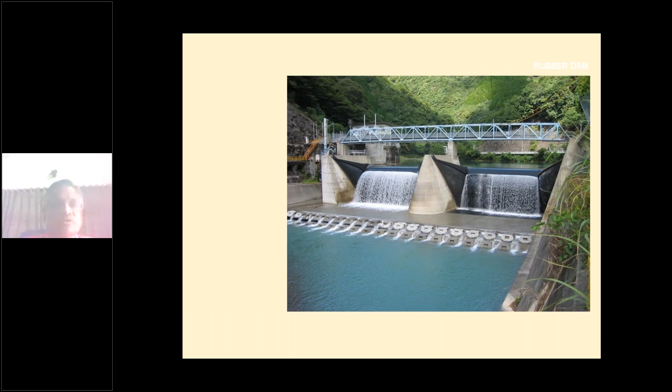The initial idea was to have a bridge very close to this place, close to the existing barrage, but it had huge technical challenges to overcome in putting another bridge there. So a decision was taken, after a lot of investigation, to move this bridge to about 600 meters downstream of the river Yamuna, and construct a bridge there.

This investigation was done and a decision was taken by the Government of Delhi, and we were asked to execute this project. The Delhi government requested Delhi Tourism to undertake it. As we started working closely on it, we were told by the Chief Minister herself that the Commonwealth Games were coming, and we should create a very significant structure to commemorate this event, one that should become a landmark for the games as well as for the city.

So this was a huge mandate given to us at that time. She was very passionate about this idea, and it made us think much further than creating just a bridge. We thought of taking it further, so we took the services of some of the eminent brains in this particular field.

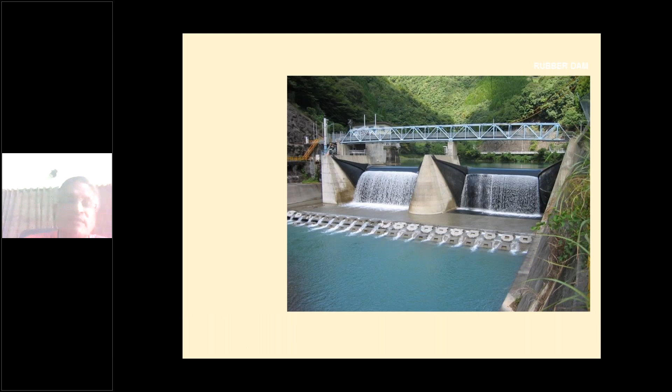To create this water body, we have located the technology of the rubber bridge, the rubber barrage. It's already constructed elsewhere, so thousands of such things exist in other places. It's simply a rubber tube which can be pneumatically expanded and reduced. Air can be pumped into it, it will come up, and it can hold water.

The idea was during the flood, the rubber barrage will be collapsed. But after the rain, once the flood is over, air can be pumped into it, and it can hold water a meter, 2 meters, whatever is required, and the barrage can be created. So during flood, you will close it and that part cannot be utilized at all. This technology was available, and we worked out the technology and cost aspects, and found it is very interesting and possible.

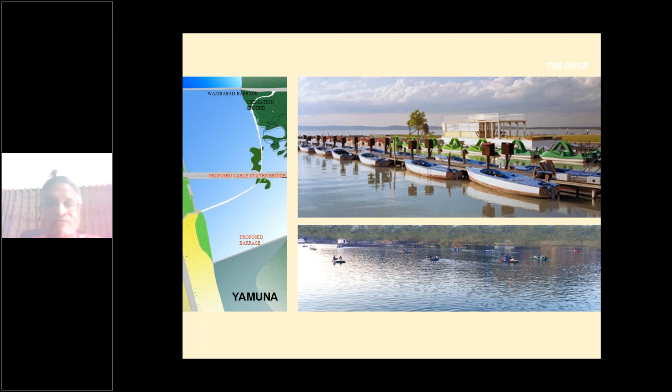This water body can be utilized for boating. There are several other things that water can be used for. The water body will become one of the central attractions for the people of Delhi. In the evenings, it's a sacred area also, and so many things can happen there. People can come in the late evenings and enjoy. You can have restaurants, floating restaurants - there are many things that can happen here.

This is also a very interesting, very religious place. During Chhath Puja, a whole lot of people come here. So we create specialized facilities for them, so that it becomes a regular evening destination for people to come and pray and pay respects to their gods.

These are some of the things happening now. People come and feed the birds, and it's a very interesting evening, but you can't approach because of the dirt. But there are people who come and really enjoy their life here. People do come and play. It's very interesting that on occasions you can see a whole lot of people, without any publicity, come and enjoy themselves in this particular area.

This happens very often. And we also have a dhobi ghat there, which needs water supplied to them every day. Practically the entire northern part of Delhi gets their clothes cleaned at this particular place. So we'll create facilities for these people also.

Then there is a Smashan Ghat, and there are so many cultural and heritage activities going on in that particular place. And on the western side, there is also a very interesting Buddhist colony, a Tibetan colony, which brings in the heritage of Buddhism here.

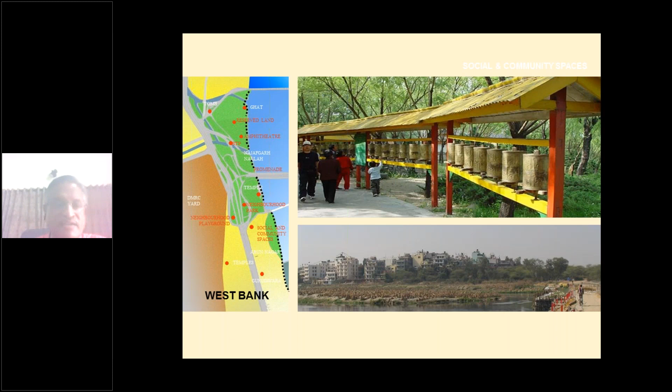We thought that we can create particular places for reviving and showcasing their culture in this area. The eateries in this place are very famous - in the evening, it's full of university people. We thought we can bring more Delhiites to this place, and this Tibetan culture will be a major attraction for them. They bring a lot of clothes and a lot of interesting food, all very economically priced, so a whole lot of people visit them. We can create amphitheaters so that cultural events can be held.

On the eastern side, we thought that we'll create places where evening people can come from East Delhi or from both sides, and we'll create places for which we have divided. After doing the hydraulic study, we have divided this particular area into 2-3 classes.

That is inundation floods, 25-year-old flood. Some areas will be inundated every 25 years. Some will be 50 years, some 75 years, some a 100-year flood.

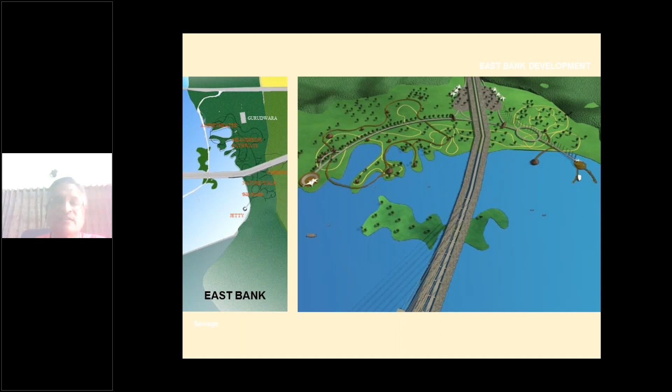So where the 100-year flood is there, we can create more permanent facilities like hockey grounds, football grounds, cricket grounds, golf or anything like that. The rest of the places can have basketball courts, volleyball courts, running tracks and everything. On the frequently flooded areas, we can have temporary structures like walkways, gazebos, eateries and other places where you can come and enjoy.

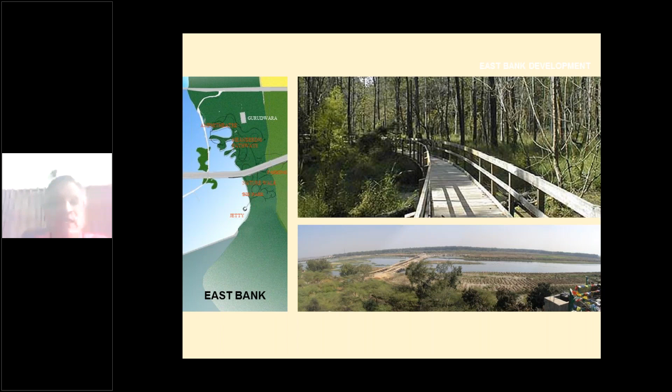So this was the basic idea of creating a tourism-centric attraction for a particular place, water sports, any number of them. So we presented the project to the government.

Because everybody was busy with preparation for the games, in one of the cabinet meetings they decided that cleaning water and getting something done in the river Yamuna is a very sensitive issue, because a whole lot of environment people are also involved. So that will take time.

So for the time being, even though they said it should be done, let TDC take up the bridge first and let them come back to us with the bridge, and we will think about the tourism destination area as a second phase. So this was a definitive decision. We said we'll keep it for the later future and focus on the bridge.

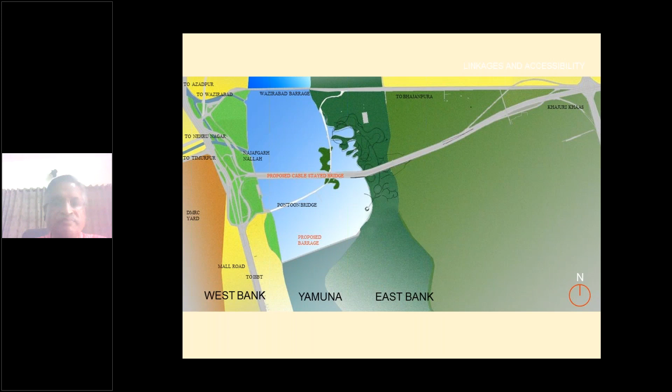From there onwards, our idea was to present a proper bridge structure to the government and the people to take a call on this. So if you look at the whole thing, we have divided the project of the bridge itself into several sub-projects.

If you look at the scheme, on the western side, where this particular road from Khajuri Khas comes to the western side and meets the ring road, we need a signal-free approach with several flyovers, or grade separators, to make the traffic smooth with no conflict.

In addition, there was a whole lot of cyclists coming from this place, so we were asked to introduce a smooth and clutter-free ride for the cyclists also. So we created a separate sub-project of the western approach.

Similarly, on the eastern side, we were to create a signal-free approach for the main traffic coming here, and at the same time for the ring road, which is going to develop as a ring road for the east, a clutter-free, signal-free traffic area. So this is the eastern approach, another sub-project.

And then the signature bridge. So there are three sub-projects in the main project: the signature bridge, the western approach, and the eastern approach. This was the scheme that we thought would make life easier for us.

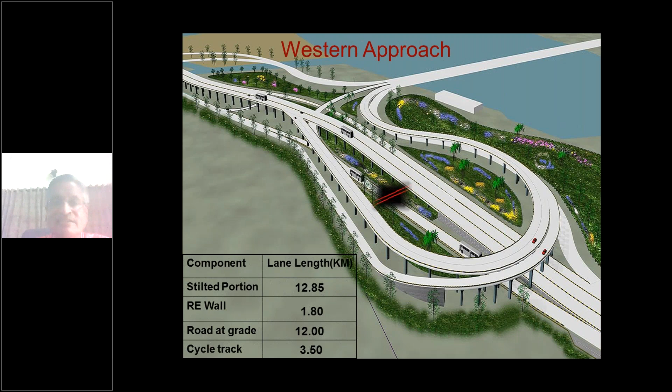But today my focus will be on the bridge only. Maybe some other time - this is a very interesting project, completed smoothly using excellent technology. If you go to the eastern approach, the stilted portion is less, about 4.76 lane kilometers, but there is a 12 lane kilometer long embankment, done in concrete.

The entire pavement on the surface is done in pavement quality concrete, using completely mechanized pavement quality concrete, and this has been done for the entire embankment here.

Almost 1.8 kilometers of RE wall and 20 lane kilometers of roads were created for the eastern approach. Very specially, for the eastern approach the entire foundations were wells. Very interesting project - on the western approach, it is all piles. So all kinds of technologies were used in this particular project.

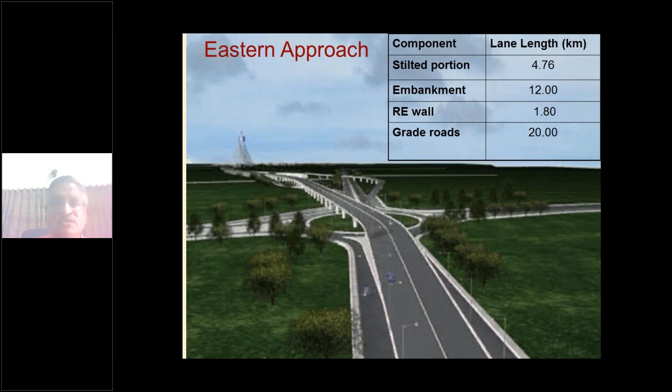And for the signature bridge, we started thinking about it. So we get into the topic of the day, the planning part of this bridge. We started thinking about it for almost 10-15 days of clear thinking about what can be presented as a unique thing to Delhi - by doing heavy engineering, at the same time very aesthetically pleasing, and it should become a memorable structure.

So this is the idea - the idea of the government, and the idea of our group also - that we can present the government something. Now this is the most interesting part of it. When such a significant word is used, what is significant? This was the idea which went up and down before we came to a solution. So this was a very interesting journey.

I thought it will be interesting for people to see how very careful and fine minds work together to create something which is quite unique for this country. So this story is a very interesting part, and I didn't want to skip it.

That is why I told the organizers that let us do this presentation in 2 parts so that it's quite interesting. It's not heavily mathematical, it's not highly technical. It is a process of how to bring in aesthetics, and as you will come to know, it is in your mind and in your determination to do good things. So that is how this project was created.

While creating the technology, we looked at the existing tall structures around Delhi, and one of the most attractive and signature structures of Delhi is Qutub Minar. I hope most of you would have visited this beautiful structure. It is also very unique that this is the tallest masonry structure in the world - many people may not be aware, but as engineers we should know. This is to the credit of our ancestors. It has not been surpassed by anybody so far - tallest masonry structure in the world, about 75 meters.

So we thought let us create something double the height - that would be one way to make it unique. So we created a cable pylon which is 160 meters high, with symmetrical cabling, meaning cables on both sides - 250 meters on one side, 250 meters on the other, with a central pylon and just cables. This will make it interesting, because the height will make it quite visible and unique.

To add a little more interest, we created a restaurant on top - a viewing platform and a restaurant on top, which can be approached through lifts running on the sides.

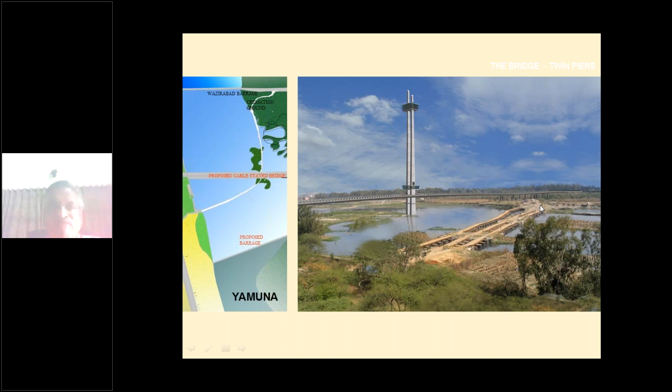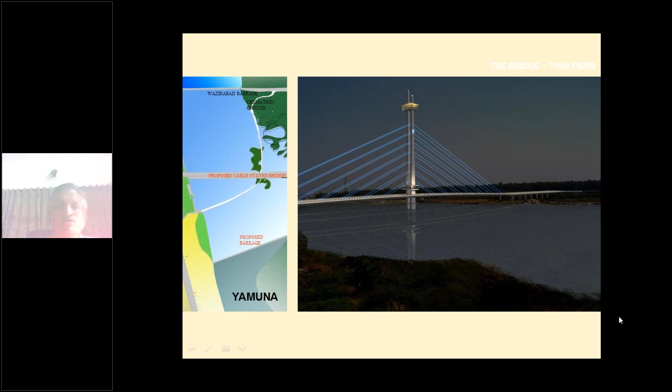This is the way it looks in the daytime. It's quite interesting and challenging. We thought it's quite challenging, and at night we can use a very good lighting system. At night this will look like this. You can see the top of the viewing platform. With all those things, we thought this is a very good design, and we will present it to the government.

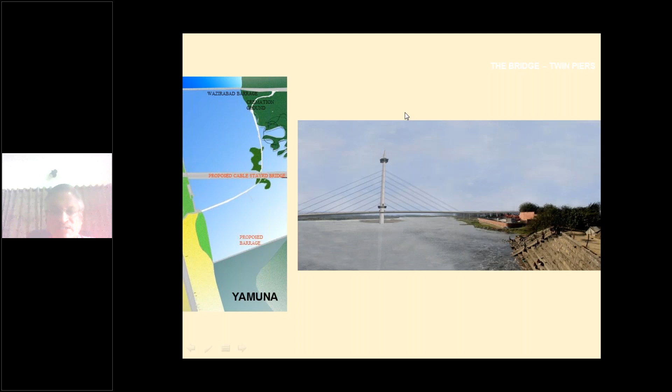So after a lot of preparations, we went to government to present this one. This is the arrival platform, and we presented it to the government. There was a meeting, the Chief Minister took the meeting, most of the stakeholders were there, and they went through the presentation very well. At the end of the presentation, everybody said it's quite interesting and worth pursuing.

Then the Chief Minister, Mrs. Sheila Dikshit, raised one very small question. She asked the main designer, Mr. Jörg Schlaich, has any similar bridge been done anywhere in the world? He can be talked about as one of the best 4 bridge firms in the world, Schlaich stands up as one of them.

So he said, yes ma'am, there are many structures like this one coming, but this has got its own features which will make it unique. So she asked, can you make something which has never been done anywhere in the world? The gentleman who was standing just sat down, it took him completely off his balance, and he sat for a moment and looked at all of us.

We discussed among ourselves, and said that a lot of work has been done, this is done. She said, fine, I'm just asking a question, can you do it? He stood up again and said, ma'am, it is possible to do, but I need time. She asked, how much time will it require? He said, I will require a minimum of 2 weeks time to go through the whole morphs again and come back with something better, a thing which has never been done anywhere.

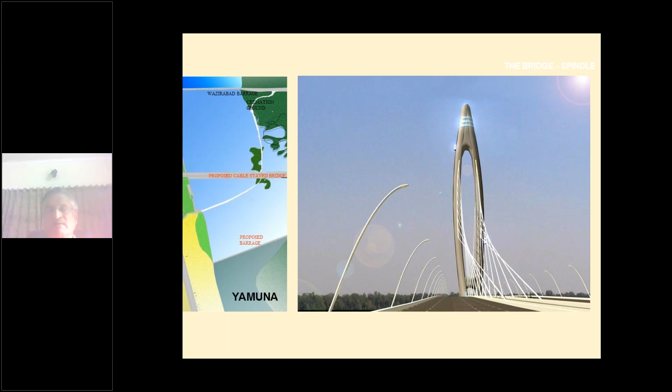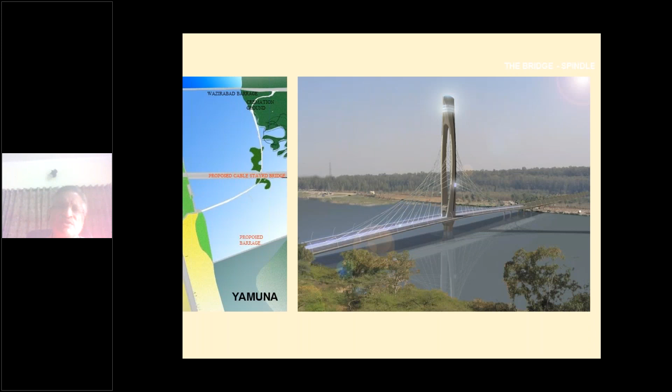We made studies on this with day and night presentations. Quite a few images were created, a lot of consultations were done, and we went back to the government. Lighting, design, everything was done and presented. This is the way it would have looked. The committee met again and went through the whole thing and said it's a huge improvement.

This is something unique, but a few people on the committee felt it has certain connotations which may not be the right thing to do for Delhi. Since it's a public project, there should be no way to criticize it as representing one side or another.

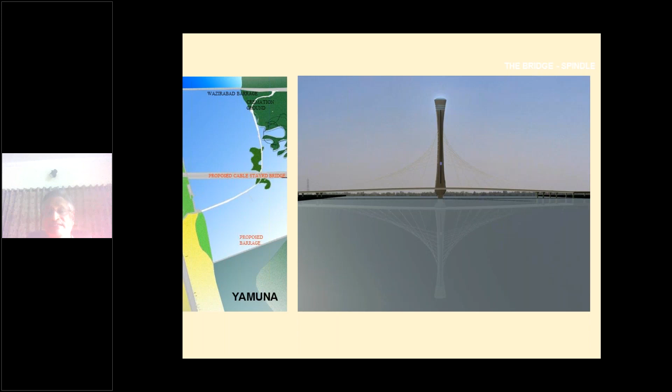So the committee raised the issue again, asking if we could look at some other design. This would take more time, but we said yes, we'll go back and try something else, and from there we started working heavily on other ideas.

These were some of the views we presented to them at that time, but this was not so good and was more or less not accepted. We had to come up with another design.

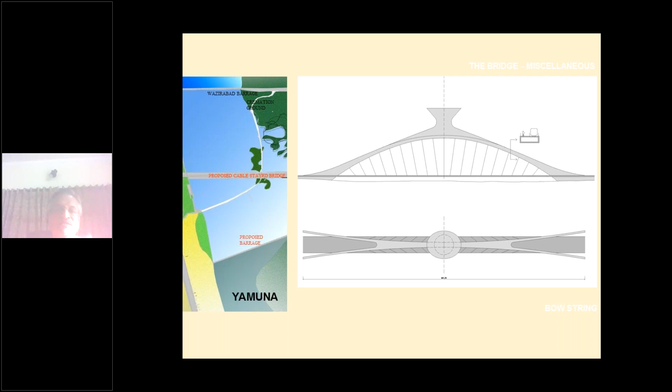But again the committee said arch bridges are nothing new in this world—there are many arch bridges already existing—so they didn't agree with this one. This was the presentation, this is the way it would have looked. Quite interesting, but not acceptable to the committee.

From there it became quite frantic figuring out how to handle this project—it felt almost impossible to get an idea that would go through. So many sketches were done, sent to the drawing room, with 3-4 different groups working on possibilities—hand sketches, discussions. Each person creates a design and then discusses it with others.

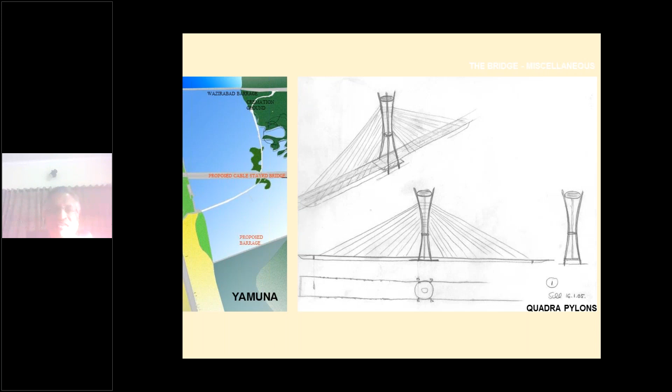This went on. Another idea was whether we could combine a cable stay with a cable net—both a cable stay and suspension bridge together, partly suspended, partly cable stay. This was an interesting concept, but it didn't come through as a unique challenge.

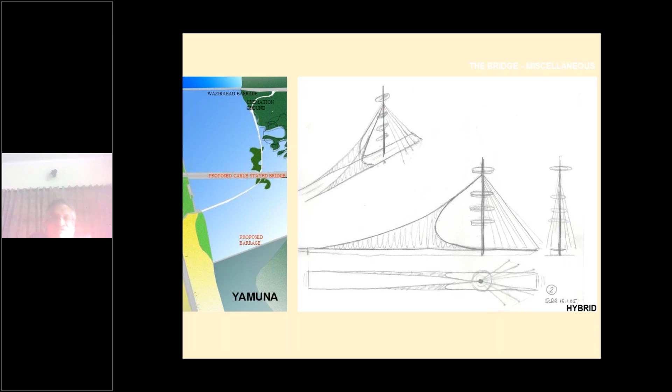Another was a Viking-style design, with a V-separated pylon and cable stays coming from the top on both sides. This was interesting because it forms a star shape at the bottom—quite an interesting design, but again it didn't find favor because there was no uniqueness.

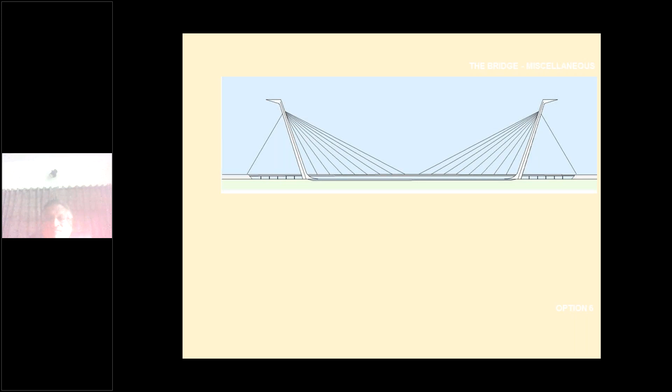This design split into two, almost like a ship, with two pylons at the ends and a cable stay almost 500 meters long. Quite interesting, but again they said there's no personality for this bridge, so try something else.

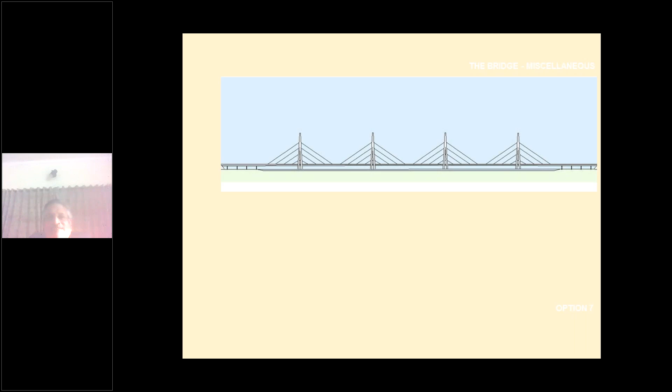Then a simple idea came because there are a lot of hills around that area—we'd go with a simple cable-stayed bridge. Again the question came up whether a cable-stayed bridge had been done before. Yes, it has been done in many places, so we did not take this design further.

From there, a solution had to be worked out—an interesting one. On the eastern side it's all forest, so people thought we could create a tall pylon, as if it's emerging from the forest, and use a cable-stayed bridge.

That design with cables was revisited and presented. When presented, they said it was okay, but a few voices said it looks like a prehistoric animal without its head. That comment killed the whole project.

The whole design that was shot down, people said this may not be a good idea, that it doesn't look so good, so let us bring something else.

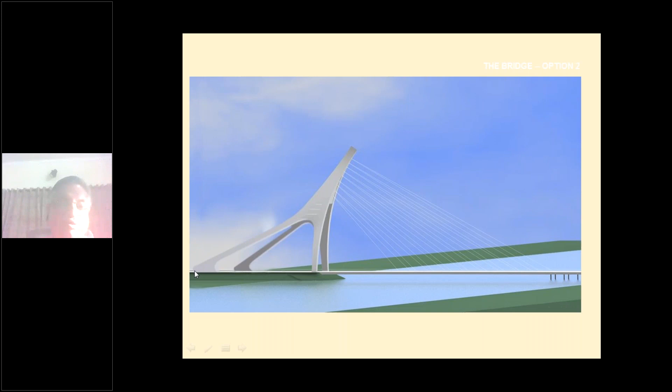So we found another solution, almost similar to that one, but changed the shape a little. It's again a cable stay bridge with a pylon curving towards the side, and the cables are strung there. This is an unsymmetrical bridge. First we thought we'd provide an unsymmetric cable stayed bridge, which is not very usual. It's there, but not very usual, with cables on one side, and the whole force pulled back by these two legs on the rear.

So this was a design which was presented. They said it looks good, except that again some kind of an animal form is coming here. So what to do about this one?

Otherwise, the shape was almost interesting. The concept was interesting, and people were prepared to go with an improved version of this one. So we looked at the problem of the long legs and solved it by bringing it closer, but it still looked clumsy, even though some portion of it was very good. The leg was creating a problem, so we knocked it off and provided 2 backstays.

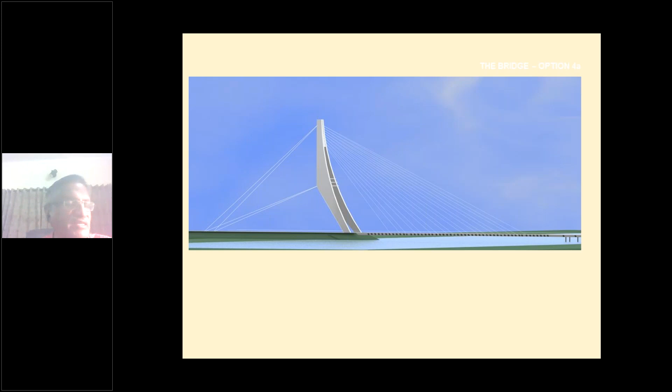That was the interesting thing, and we went forward and made a major change. This has saved the day. The idea was to reverse the inclination to the backside, so the whole pylon was reversed. It's almost like falling down, inclined towards its back, and then the cable stay keeps the bridge there. This is a very interesting concept.

In fact, this is the concept that finally went through. If you look at the dynamics of this project, it looks so dynamic. The concept is that the pylon is trying to fall down, and it is being kept by the deck, by the weight of the deck, or the other way around, the deck is being held in position by the weight of the pylon. So it is an extremely delicate balance of the two structures.

One of the best, most ingenious structural solutions has been worked out. The idea was that any variation between the weight of the pylon and the deck can be managed by the backstays. This concept was very interesting. It is an excellent structural solution, very simple, but at the same time extremely aesthetic.

So this design was more or less looking very good, but one question came. Everything is nice, but the two backstays on the top are slightly killing the whole dynamics of this project. The aesthetic is killed by these two. The question came whether we can remove it.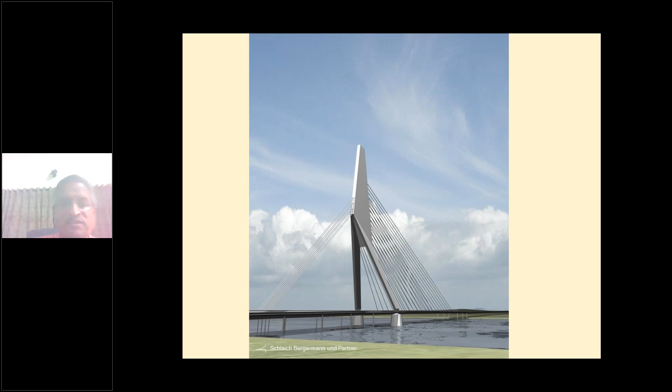Different views and different dimensions were selected. The ultimate idea was that this is a bridge which is in the form of a namaste, which has an Indian character, as if we put our folded hands and welcome people from that side. So this is actually a form of a highly Indian motif of a namaste, using folded plates, and it was doable.

Only thing is, it has been done in steel, which created a major problem, a controversy. It created a problem for the team. It almost jeopardized the project. That is the only issue, we'll come to that later in the lecture. But the scheme was accepted, and we started working on it.

So from there we created a design with a folded plate-like structure, with a viewing platform on the top, almost 25 meters high, which can be lighted in the night. This will have about 25 meters and four decks to which people can come.

And on the front there will be cables, 16 pairs of cable, and on the back there will be 4 pairs of cable. The concept, as I said earlier, was the weight of the pylon balances the weight of the deck. So it's a fine balance of the two forces, and any unbalance due to live load or other forces will be managed by these backstays. So this concept was very interesting, aesthetically very nice, structurally very interesting, good to look at, and very efficient also, except the cost. So that was the issue.

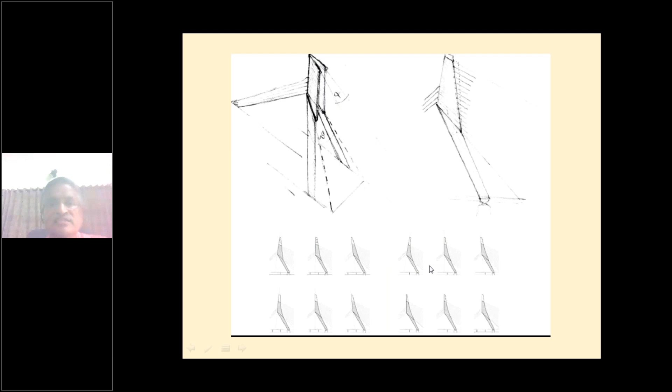So we studied the profile, a lot of studies were done on what should be the profile. A number of studies were done and finalized the particular dimensions. And this is the way it would have looked - a namaste, a huge namaste to hold people.

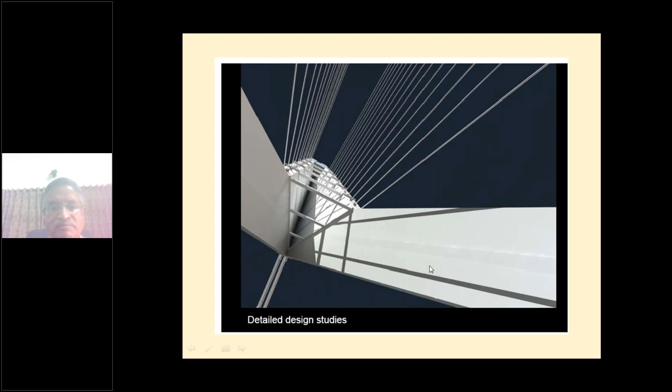So this design was accepted and the detailed study started. From the architectural profile, one has to convert this into a structural scheme. So this is what has been done there. On the top is the architectural scheme, which was accepted.

And on the bottom, this becomes a structural thing with spans. Main span is 251 meters and the height goes to 151.14 meters from the deck level. On this side there will be a normal span. This will be the 4 sets of backstays. This is the 16 pairs of front cables. So this is the way it is done, and there will be another 72 meters of approach.

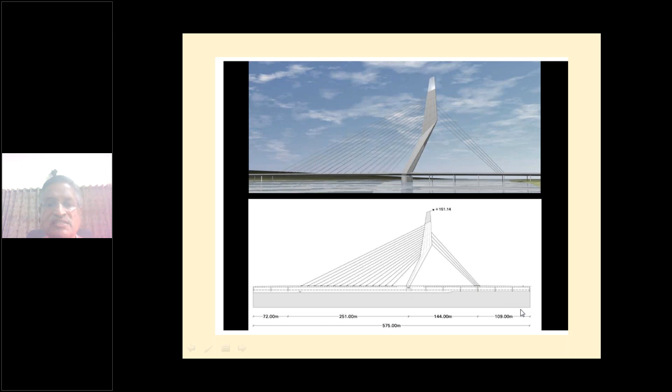So the first expansion joint is here, the other one will be here. Total 575 meters of the bridge. This is the structural system that was put to design. If you convert them into a simple design, you will see like this: the first expansion joint, the stay cables, and a composite deck. Basically it is steel and concrete. Where major innovation has been done here, we'll come to that later.

This 251 meter main span, 16 pairs of cables, and the pylon, we have divided them into doable parts so that it can be fabricated elsewhere and assembled at site. So this was the idea.

Backstay cables, 4 of them, and this particular place is a very huge innovation in terms of its foundations as well as the bearings. So this is another innovation. We'll discuss it later in the next lecture.

The issue was this particular backstay cable brings a huge uplift to the top. This uplift has to be kept down by a dead man from here. A dead weight is required here. Creating a dead weight was an issue, and at the same time, since it is a deck with a bearing here...

This is a steel diaphragm bearing, almost a rotating fixed bearing. Interestingly, maybe we can discuss in the next one, this is the biggest bearing in the world. This particular bearing is a steel bearing. At this time, I think we still hold the record. It's the biggest bearing in the world. So this particular place almost cannot move.

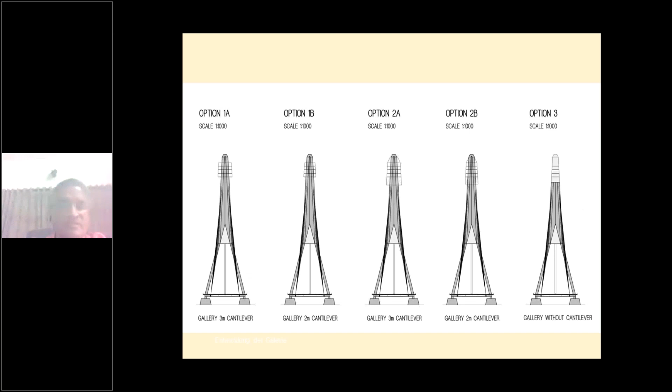If you look at the deck, the deck has 36.2 meters as the width of the deck, end to end. It's almost the normal span of a bridge. So that is the interesting thing. And the whole thing is kept with one single steel beam, which is this particular beam. This beam is there; several such beams are there.

This beam is pulled up by cables. From here, 2 cables go up, and come down, and that 16 pair of cables lifts this particular longitudinal beam, on both sides. And from this beam, these particular steel beams are being done. Several of such things, and of course connected by cross beams also. So this is the basic deck.

On the top of this, there is concrete. This again is an innovation that has been done here. This deck has been created with a precast concrete deck. So that is a very interesting innovation that has been done here. The whole concrete was done using precast panels. So the quality was maintained, and we saved time also on this one. So this is the basic cross section of the bridge.

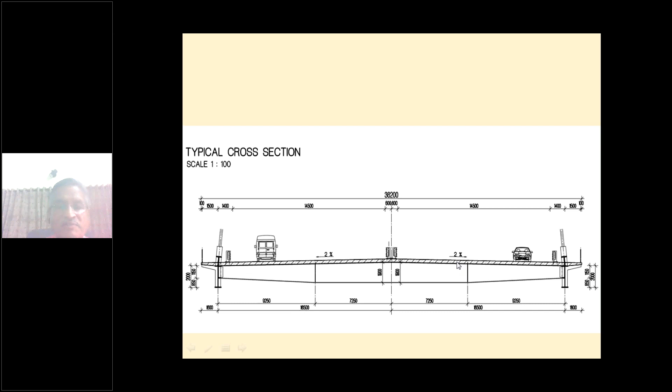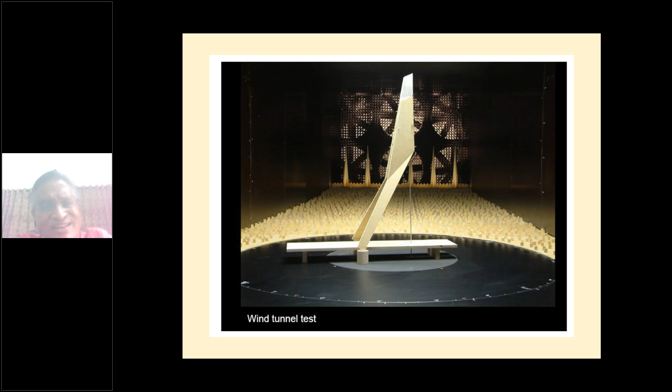Studies were done on the pylon, and then the design started. We had to do wind tunnel testing because the Indian codes, or any other code, don't give the pressure coefficients for such a unique structure. The only way was to do a wind tunnel test.

We wanted to do it in India itself, but we went to many places with wind tunnels and either they were busy or there were time constraints. Finally we had to go to Germany, and the wind tunnel test was done there. The pressure coefficients and other dynamic parameters were worked out, and a report was given back to the designer.

The interesting thing is the complete seismic response analysis of this structure was done by the Indian team. I must compliment the Department of Earthquake Engineering, IIT Roorkee, who did the design. Since this place is very unique, being alluvium, a proper site-specific study had to be done. They created the spectra and used it to do a very detailed dynamic analysis. The report is very interesting for anyone doing research.

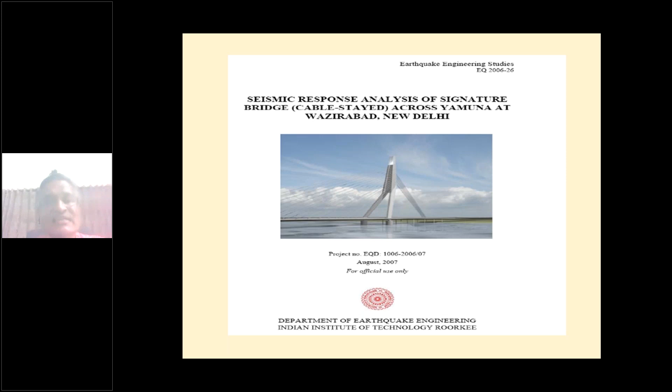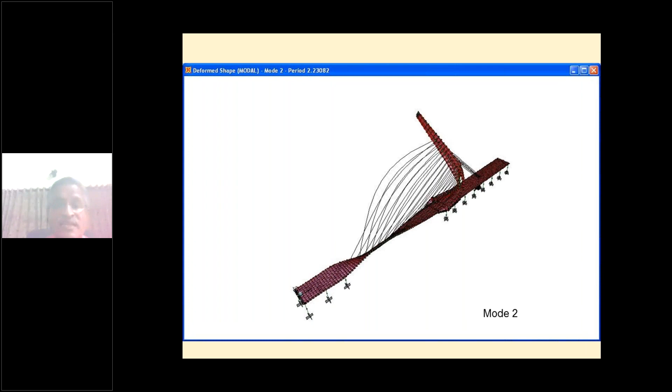The design came from the Roorkee team, and the mode shapes were worked out. They had to accommodate about 100 modes to reach a solution. So the first mode would look something like this. This is the second mode in the cables. The third mode, again, you can see there were several modes.

Finally the analysis was done for dead load, live load, and other combinations, along with wind, which is not very significant except for the cables, and the earthquake design. Finally the design sizes were finalized. The stick model was worked out, and the stick model analysis was done by the designers, Schlaich Bergermann and company. The stick model was analyzed, the 3D analysis was done, and the sizes were finally worked out.

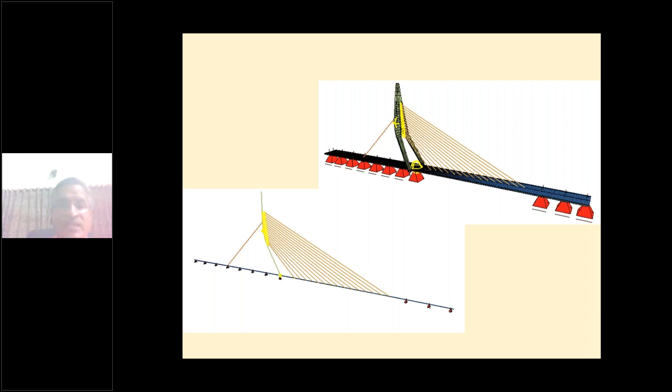These are some of the bending moment diagrams that came out of it, normal for dead load and pre-stress. There were several combinations. The bending moment diagrams are very interesting.

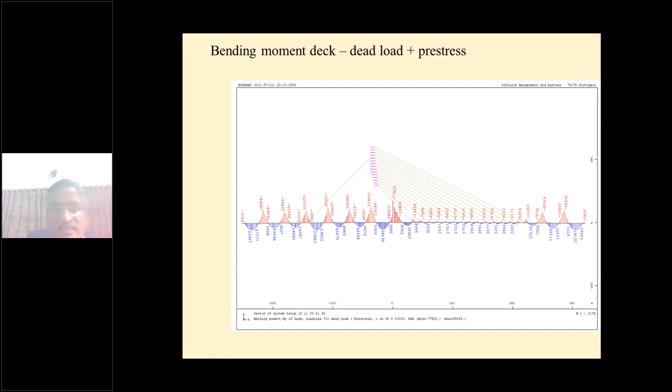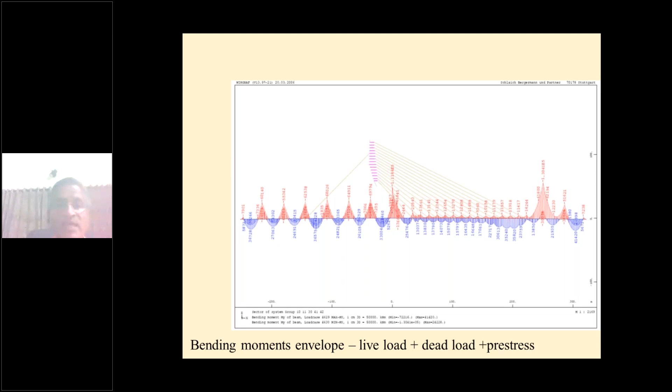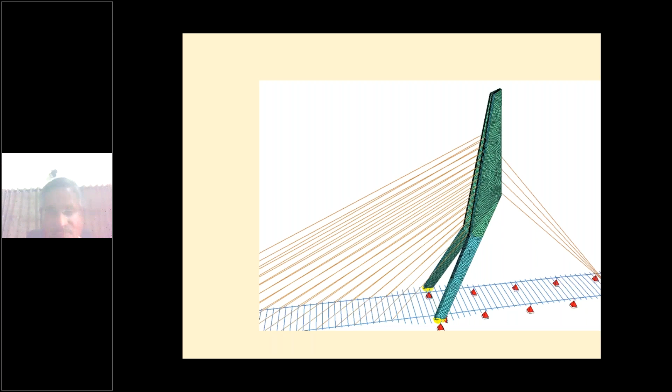This is the deck forces from this analysis, and finally the sizes of the stick model were finalized using the stick model method. From there, the designers, like Bergermann and Partner, went to a 3D analysis with finite elements, to confirm that what had been done was absolutely correct. This 3D dynamic finite element analysis confirmed, after several trials, that the forces and designs are manageable. This is the typical diagram.

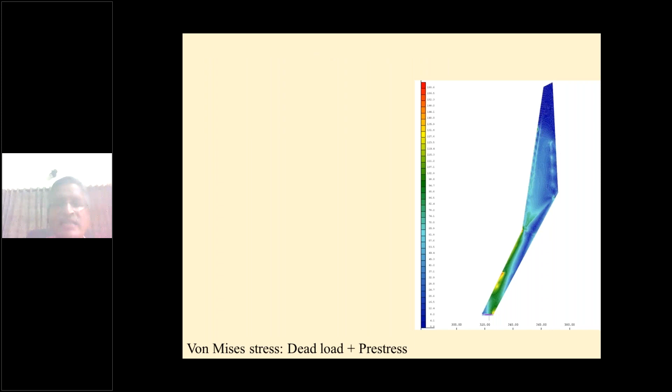There are a whole lot of reports available, interesting to go through. From there onwards, once the confirmation came, all the structural sizes were finalized, and they started working on the methodology of execution.

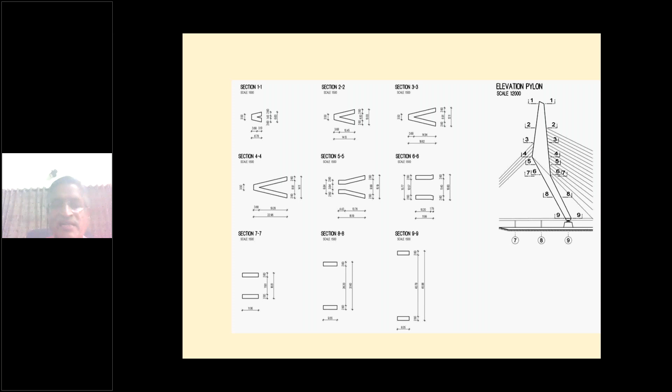One has to find out the methodology of construction so that these pieces can be designed, because the weights are to be managed and the fabrication has to be done. A whole lot of issues were to be sorted out, but it is very interesting detailed engineering that was done. This is the way it looks.

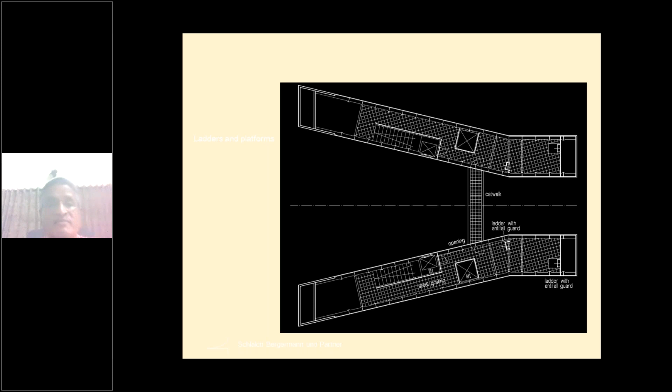The structural drawings were prepared. Each element had to be drawn. Almost 1,000 drawings were prepared to make these things available. This is a typical cross section of the top of the pylon, and you've seen the bottom of the pylon with two legs coming up. This is the top of the pylon, and most of the members were worked out.

Initially it took some time, but it was all finalized, the drawings were prepared, and the fabrication plan was finalized. This is one of the very interesting things that was done. The body was divided into parts starting from the base, 1, 2, 3, 4, and so on. This is the joint, which we call the bend, and from there several parts were made so that it is possible to fabricate them, bring them here, and erect them using a crane.

So this was the concept. But in the process, a problem came when you cut the whole pylon into pieces. These joints become a very difficult thing. Not that it's doable, earlier we could do that, and in a normal bridge it is not an issue because we put cover plates and just bolt or rivet them. But the issue here is this is a very unique bridge. We are building it for aesthetics, so we can't have a huge array of plates and bolts, or practically the entire structure would be just plates and bolts. So this had to be avoided anyway.

So this solution came from an earlier bridge done in Hong Kong, that the vertical loads, which normally transfer through the plates, can be transferred directly from the top plate to the bottom plate. The only thing is the two plates should match absolutely, without any imperfections at all. So those parameters were worked out, that it has to be absolutely plane, a millimeter in a meter, which is extremely difficult to create in a workshop, in a fabrication shop.

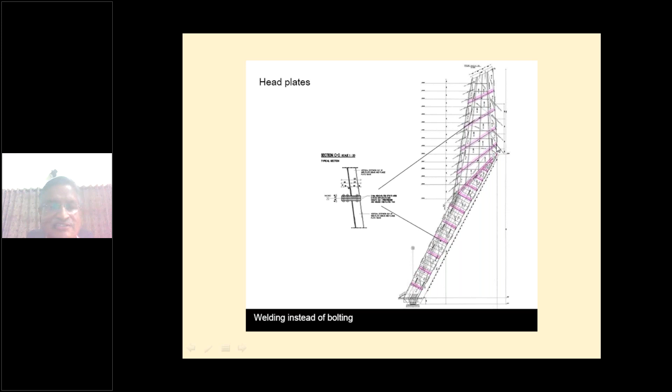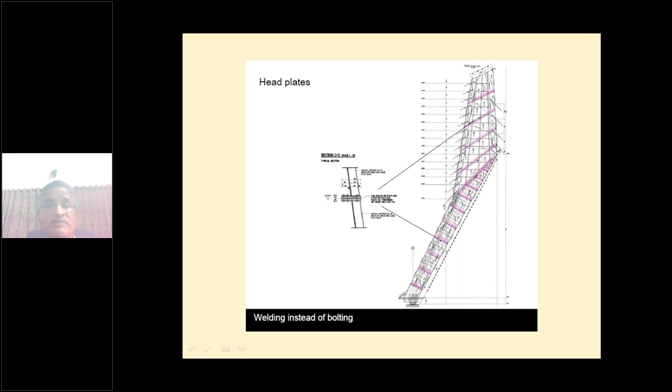The structural system was worked out, but it created a problem of extreme precision, because some of these plates are almost 20 to 23 meters long. To create an absolute plane to match and mate together is a huge engineering challenge, so that is the construction engineering we will discuss in the next presentation. With no bolting allowed at the entire site, only welding was permitted. So this has been done, and this is the basic concept: very little bolting, and most of the structure is transferred through direct contact.

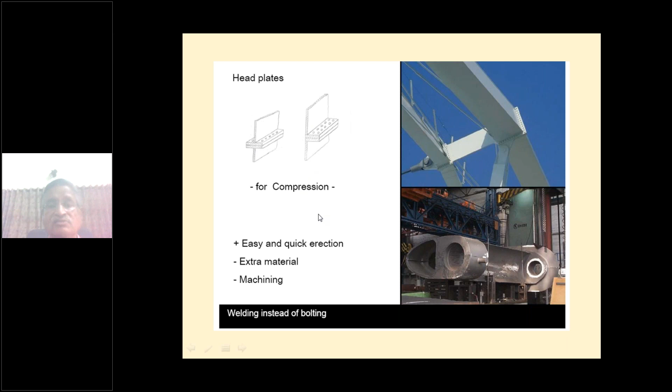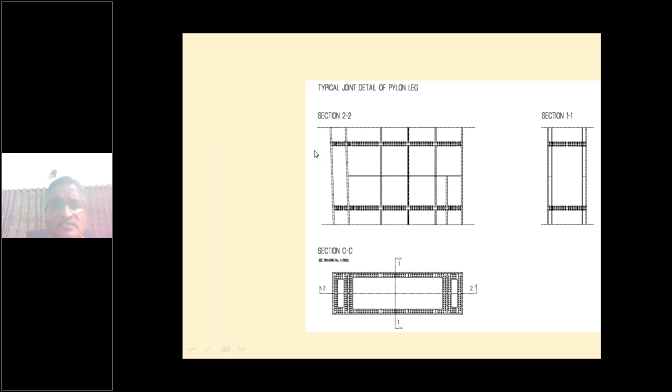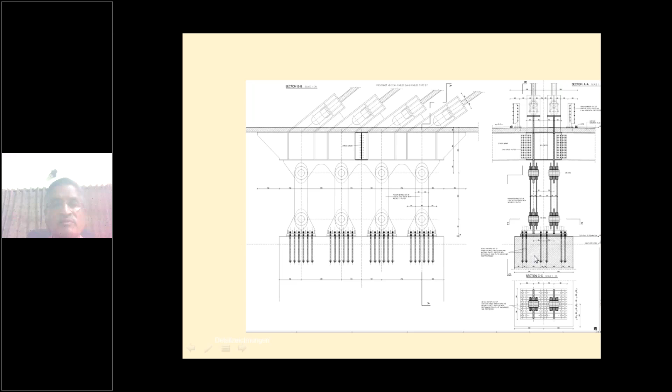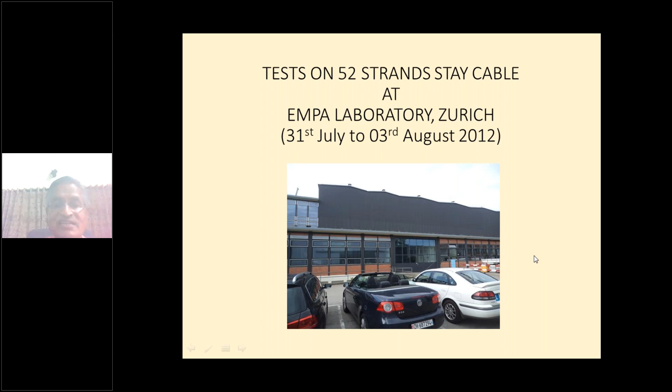So this is through bearing, we'll have a look at it in the next things, but it's a very interesting concept. And then the cables, before finalization, had to be tested. This was done by the EMPA laboratory in Zurich. That is why we had association from a whole lot of people, about 10 to 14 countries across the world. So the testing was done in a very well equipped, one of the best laboratories in the world.

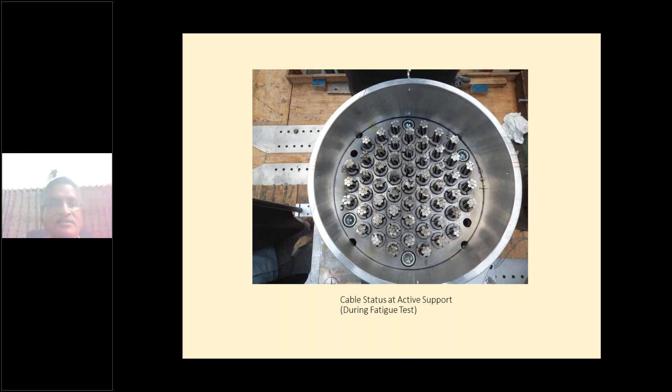So those were tested. Unfortunately, this is the anchor. Even though the cables were coming from one of the most advanced countries in the world, the first set of cables failed after a lot of testing, because it has to be done for 1 million cycles. After 1 million cycles, they found the failures were unacceptable as per the codes available. That gave a setback to the project, and they had to find a different company, source it again, and get it tested. Fortunately, the second one passed. So these are some views of a very interesting, very fine engineering testing laboratory. This is the typical thing.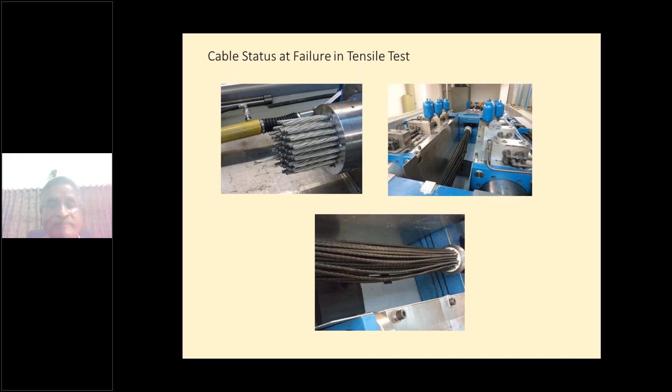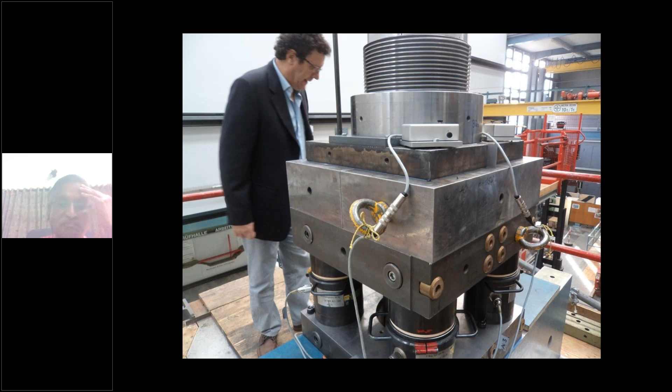It will have vibrations happening, and over millions of cycles it can continue to do it. This is the typical cable status at failure, the failure of the cable.

This concept was tried by us in another project, but finalized here. This saved a whole lot of time, because the structure is done and the paneling work can be done parallelly. So this is the way it has been done.

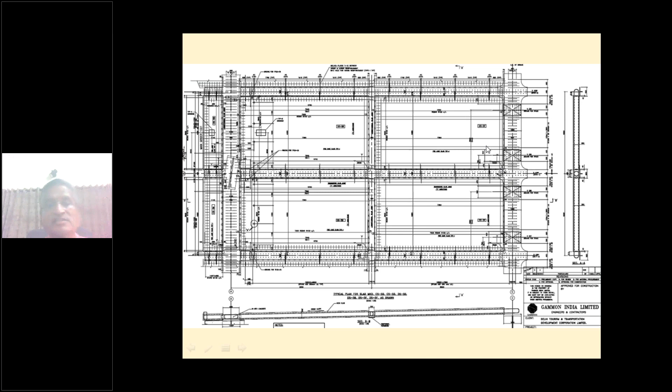This is a typical panel that has been done. Each one was numbered and specifically taken care of at the casting yard.

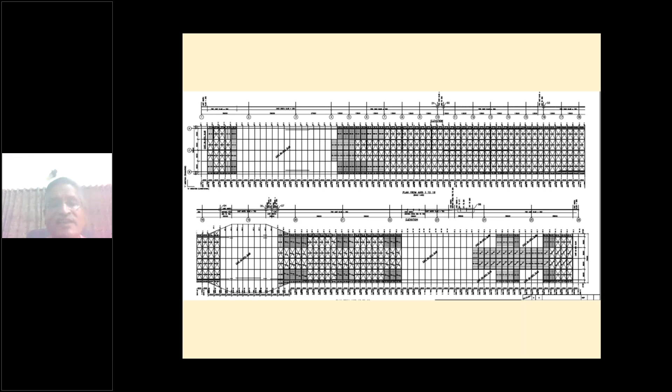We also did a very interesting design motif on the surface of the bridge, Yamuna, and you can see the motif which has been done. Now it has been completed, you can have a look at it.

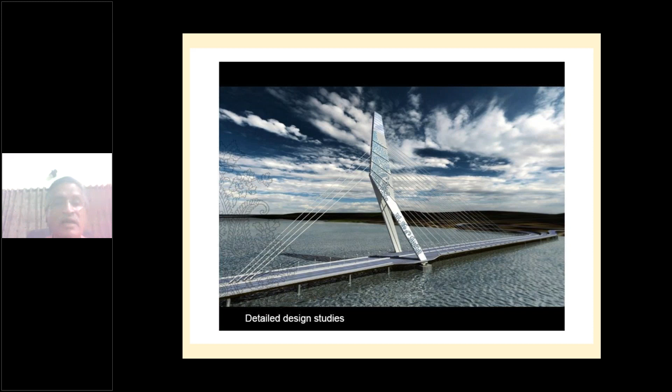The quantum of concrete used is about 45,000 meter cube, and about 4,700 tons of reinforcement. Steel was of the order of about 15,000 tons used for the whole project. And the grades are very interesting.

At the time, many of these grades were not available. The advantages we'll explain later. It is the S355 J2 plus, that is a normalized one, then 355 NL, 460, 355, and Fe250 of course, were used in this project.

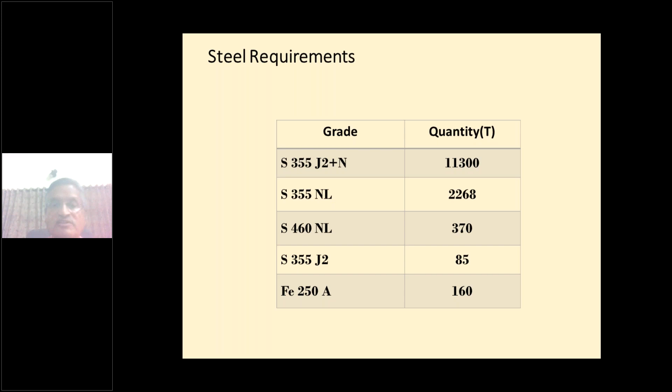One of the major problems that gave a huge setback to this project and put everyone of us in peril was when we went for procurement, we went to the market in October 2006, and the tenders were received in February 2007. What happened was this was the time when China was creating infrastructure for the Olympics, and they were buying steel from all over the world, with the result that the price of steel almost doubled.

This was the Dow Jones index. It went from 250 to 400 in the span of calling a tender and receiving a tender. This put the entire project in jeopardy because the cost doubled, and nobody would give us approval to go forward. So when the tenders came, we found the cost had gone much beyond its original design, basically because of the market mechanism, because we went to tender at the wrong time.

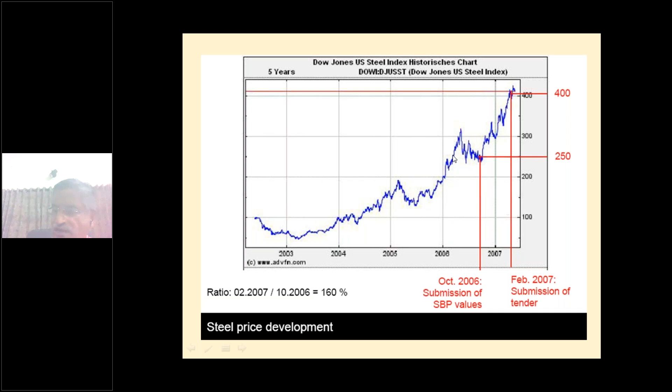So this created a whole problem, and no approval. Nobody was prepared to give the approval for this kind of a situation.

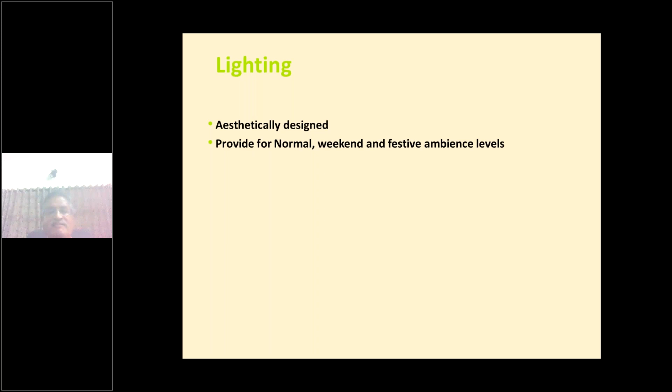So this was the original design. Part of it has been executed, and this is the way it will look at night, with the lighting elements done.

One of the most interesting things not done at such an elaborate scale in India is the bridge health monitoring system. It is a comprehensive health monitoring system that will track the health condition of the bridge on a continuous and real-time basis, and the results will be analyzed and available in your hands on a live basis. It provides the basis for design validation, which was the main thing we could achieve.

It ensures safety of use, including traffic counts, and takes care of wind and precipitation, among many other things. This data can be used for maintenance planning and long-term performance assessment, so that in future you can do it. So, a very detailed instrumentation system.

In fact, this will be very interesting for a lecture, the entire instrumentation scheme itself. Now it has been completed. It will be very interesting to go and look at it, and another lecture can be organized on this alone.

It will have wind, temperature, and pressure, and the rain, the precipitation, this will be there. Then cable forces are measured, vibration, and then the temperature and strains, all those things are done.

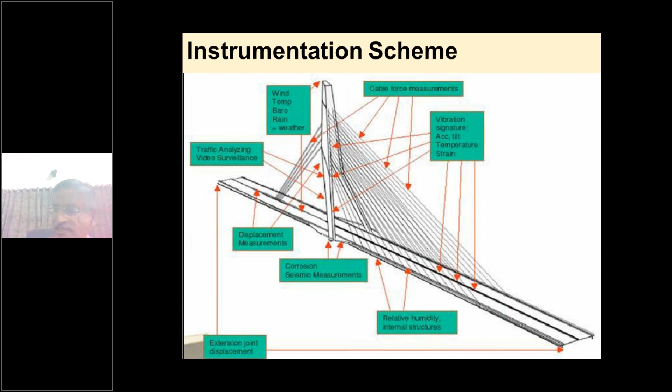Then relative humidity, seismic measurements, displacement measurements, traffic analyzing by video surveillance, and joint displacement - all those elements are done completely automatically using sensors. Such an elaborate system, and all the data will go real time to headquarters and get analyzed, and triggers are created whenever some particular value triggers, it comes on your center or on your mobile phone, so that monitoring can be done very carefully at all times.

So what parameters - environment conditions like wind, rain, and other things, displacement, tilt and distortion geometry, acceleration, loads and cable forces, corrosion, fatigue.

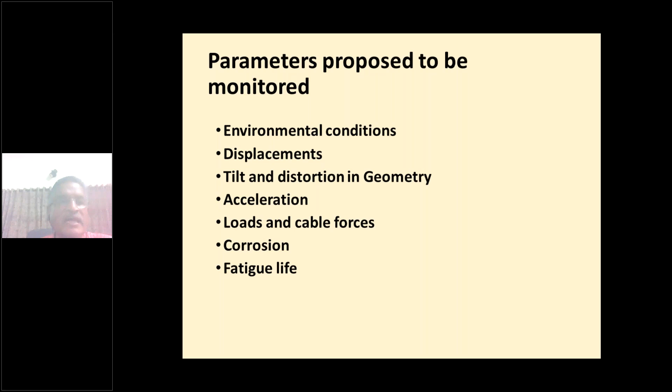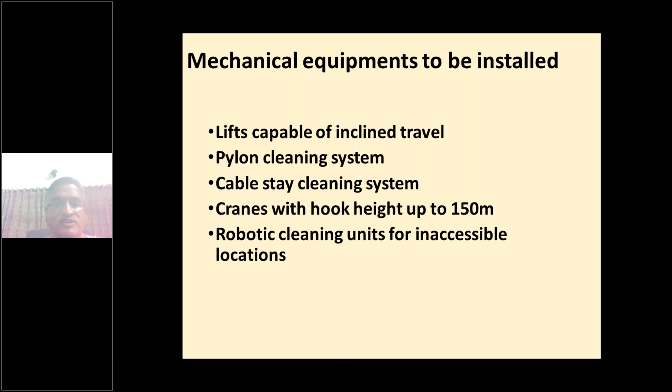And then we have other mechanical equipment installed, like the lifts - the incline lifts, a very interesting element, because these lifts have to move inclined in two directions, one way and both ways. There's also a pylon cleaning system, cable stay cleaning system, cranes and other things for approach safety, and other cleaning systems. This is the typical cable cleaning equipment.

I'll come to the last part because I have only a few minutes left. The main bridge design consultants - hats off to them - it's a joint venture among Schlaich Bergermann and partner from Germany, and Construma Consultancy Private Limited.

Very capable team. The entire bridge design was done by Schlaich Bergermann, Jörg Schlaich as well as his son Mike Schlaich, my friend. And the Construma part did the entire foundation design headed by T.N. Subbarao, an eminent engineer. We lost him recently, and that was a good job done by them.

Then the entire architectural issues, all the headaches, were borne by Ratan Batliboi and Associates, right from beginning till the end. He has been with us and contributed immensely to the aesthetics of this project.

The proof consultant, we have one of the best, Systra from France, and one of the world famous bridge engineers, Michel Virlogeux, who did the Millau viaduct, one of the best structures in the world, even standing today. And assisting them from India was Mrs.